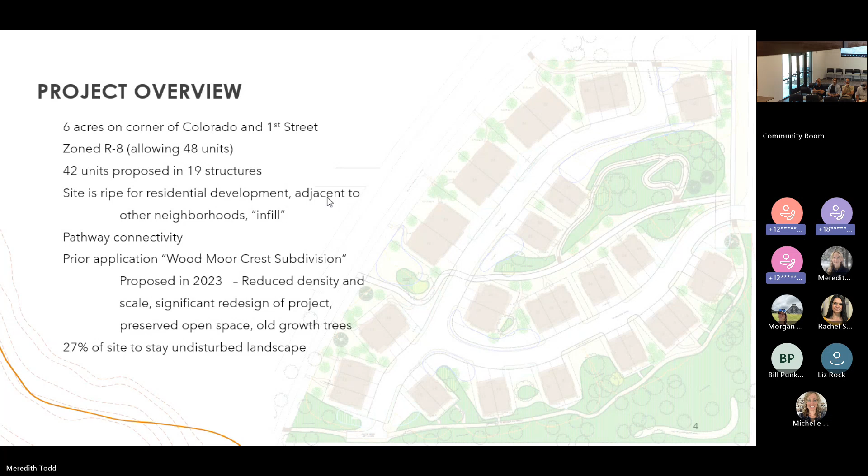Just as an overview, and I don't want to belabor what a PUD is compared to just a subdivision application. Overall, the PUD will permit some flexibility with code interpretation.

The goal is to preserve natural scenic qualities, efficient use of parks and open space, harmonious variety of neighborhood development and urban amenities, and to promote local housing. That is from the McCall City PUD code. I think this proposal does exactly that.

I mentioned this, but the density being below what is allowed in this zone is noteworthy, and this developer is not asking for any density bonus here. We are going to ask for some code alleviations, and I'll talk about them later, but there are some code alleviations we are asking for, which are really just inherent in a townhome type proposal.

As I mentioned, so what are these 42 units in 19 structures? Would you mind going back, Meredith? Thank you so much. We have what they're called Meadow Townhomes, Trailside Townhomes, Pine Grove Townhomes, Aspen Glade Townhomes.

If you look closely at the design, it's been amazing what Epicos has done with this, which is to show you the 2-story duplexes, 2-story daylight duplexes, 3-story duplexes, and 3-story triplexes.

The 3-story triplexes, the proposal has 4 of those, and they are really thoughtfully placed on the property in order to preserve open space, in order to preserve historic trees. Also, so that when pedestrians or drivers on First Street or Colorado approach the neighborhood, it's not like this mass of development. It really looks more natural and cohesive with the property.

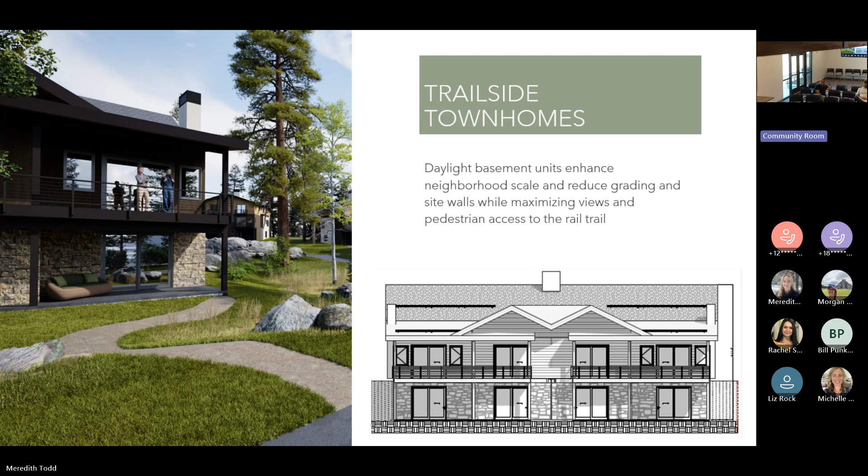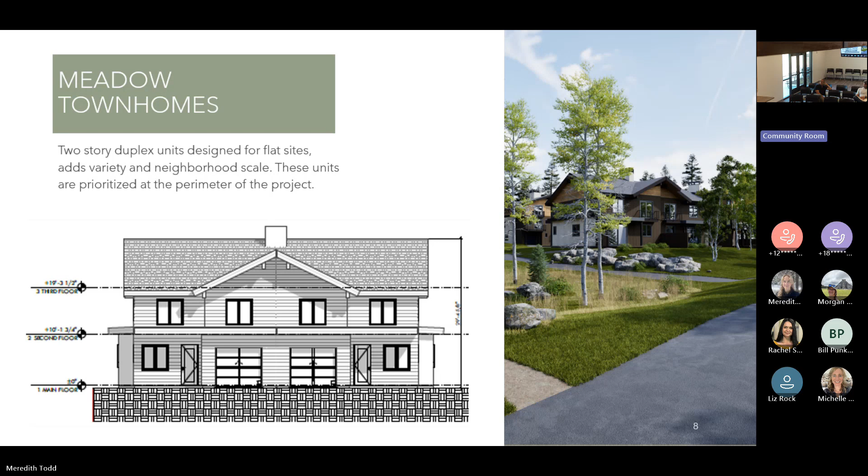The Meadow townhomes are a 2-story duplex that works on a flat site. These are a little smaller than the last duplexes, and we're locating some of them more adjacent to the existing neighborhood, so they stay in scale with it—2 stories tall with a roof, nothing outrageous. We're not trying to push any height limits on any of these.

The next unit—jump in if needed, since I've been in these files so long—is the Pine Grove townhome, where we start getting into 3 stories. They are predominantly buried into a sloping site. The lower right image looks at the backyard, showing how they exit out their back door onto a trail or pathway. The left image shows where the car pulls up to the garage, which is a partially buried garage and lower level, keeping them stepping with the site.

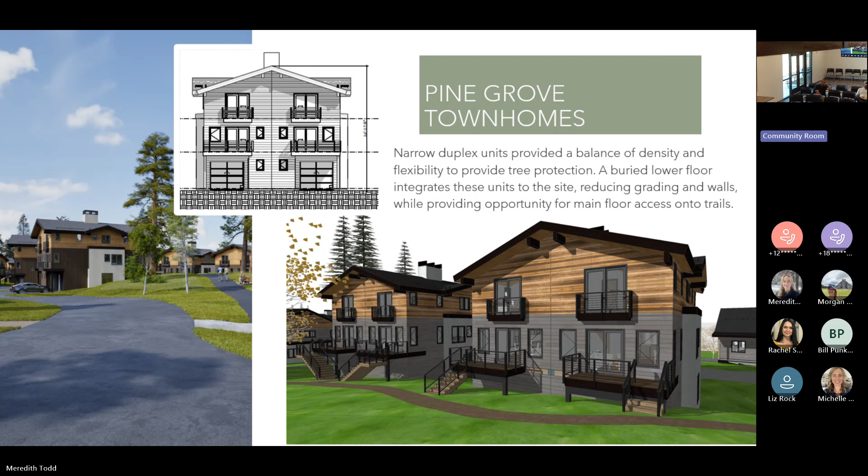Those are the ones where we really skinnied up the footprints. Then there's the Aspen Glade townhome, which is a triplex unit. We took that previous unit, opened it up, pulled it apart, and put a third unit in the middle. The middle unit is actually slightly larger than the side units, to help compensate for not having those extra windows and things like that. We think those will be very livable, and they help us keep the density a little higher. We located them in areas where we have a bit more room between the existing trees.

I'm not sure how deep we want to get into the design of the units. The materials and siding are very much in compliance with what's envisioned in the McCall design review code, using natural colors and natural materials. It'll be a combination, and because it's a townhome product, we'll use some fiber cement and composite materials with good warranties to keep longevity up and maintenance down.

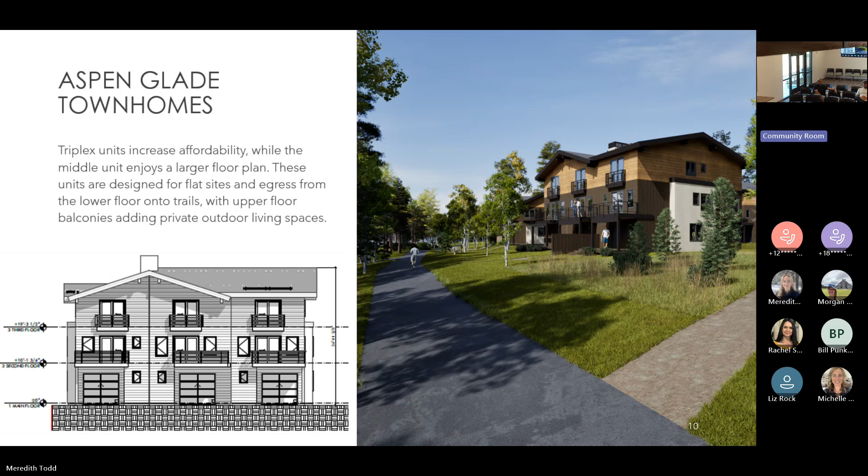Next slide, back to Emily. The highlight of the landscape for this site is preserving as much of the native vegetation as possible, then enhancing it with more natives brought back in. I walked along the rail trail on my way here, and I'm excited to continue the continuity of those aspen groves you get on the skate park side, back up into the site.

Everything we're proposing already exists. We're not reinventing anything, we're just making it new and fresh while fitting within the fabric of what we love about McCall. In addition to keeping the large trees, we're implementing fire hazard mitigation, so some of the small trees will be thinned. We'll have buffers around the units that increase resiliency in case of fires, and we're really close to the fire station, which is great. We love these urban infill projects because we get to keep more of the existing trees.

Just to note, as you'll see in the rendering above, there are some boulders. We are not doing any concrete or manufactured retaining walls for this project. Any retaining is done with natural local boulders, and those locations are really minimized in order to preserve trees and add pathways. There's no retaining around the buildings because we integrated the architecture into the site plan.

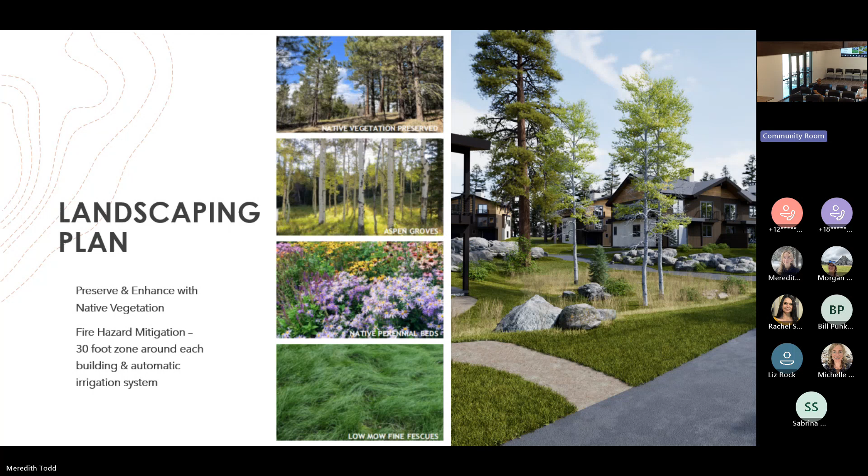Those are to the standards requested by our wonderful Parks Committee. We had a really great experience working with that committee. They had some really helpful feedback, like recommending we add a transition zone of hard surface 10 feet off the hard surface pathways, to transition to the natural surface gravel pathways so gravel doesn't travel onto the hard surface and increase maintenance. Great experience saving trees and adding paths, and the site will preserve native vegetation.

With that, we can turn it back to Amy for some of the more technical amenities. Thank you, Wayne and Emily. The PUD code requires 2 amenities. This proposal may have many more than that, but as a commission you just need to find that it meets that requirement. We've talked a lot about that east-west paved pathway.

Another amenity specifically recognized by the code is a picnic area type of place. This would be maintained by the HOA, with a natural surface pathway leading to the picnic area.

We are proposing 4 deed restricted local housing units. The contemplation is that they'd be throughout the subdivision, not all grouped together as previously proposed, which from city staff's perspective didn't make sense. This would allow, if the developer decided to do a phasing proposal, that a deed restricted local housing unit would come online as each phase is built, rather than being held off until the end. There would be one in the first phase, one in the second phase.

That's just part of the opportunity in the PUD for the developer to come up with a development agreement with city council to do a phased project, so we're leaving that door open. Talking with Alan and his team, it sounds like the infrastructure would all be put in at the same time, with phased construction. And I loved this when we met with the parks group.

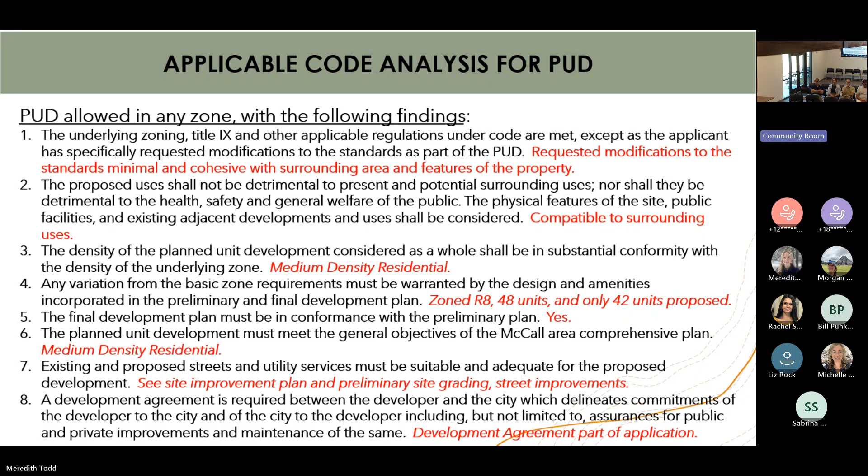And then the last aspect is that development agreement, which is required between the developer and city. I included a preliminary one in our packet, and then we just work on that throughout the application to really make it make sense with Morgan and Meredith and the whole group on what their requirements are. So I just wanted to touch on what that is.

Specifically, what are we asking to be alleviated? This is where we hit on it, and it is outlined in our narrative. I'll just highlight them, and then obviously I will stand for any questions.

These are all code alleviations that you see in townhome projects, because townhome projects don't make any sense with setbacks and lot coverage. They share walls, so they don't make sense under certain residential codes generally. So you'll see the minimum lot size, setbacks, lot coverage, the private open space. There is no private open space when two people share a wall. And so those are really just the common ones that you see with any kind of townhome project.

The garages are a little bit more unique maybe in this PUD than all of them, but this garage door is occupying more than the allowable 50% of street facing building facade. So this is a little bit confusing, but all the parcels are going to be accessed by internal streets. So the garages, because of the way that they are, are over city code allowance, but they're not public facing, so the impact is very minimal there.

The private right of way is less than 60 feet, clustered density to preserve trees, and it still provides a 22-foot driveway parking spaces. And then the height limit.

I had a lot of back and forth trying to understand with Emily, and she was so helpful to understand what really is the impact of this height limit. Like, are we going really high? On the 35-foot city height limit, the 4 triplexes exceed the height limit from existing grade, but at the proposed grade upon construction, they actually won't exceed the 35-foot height limit.

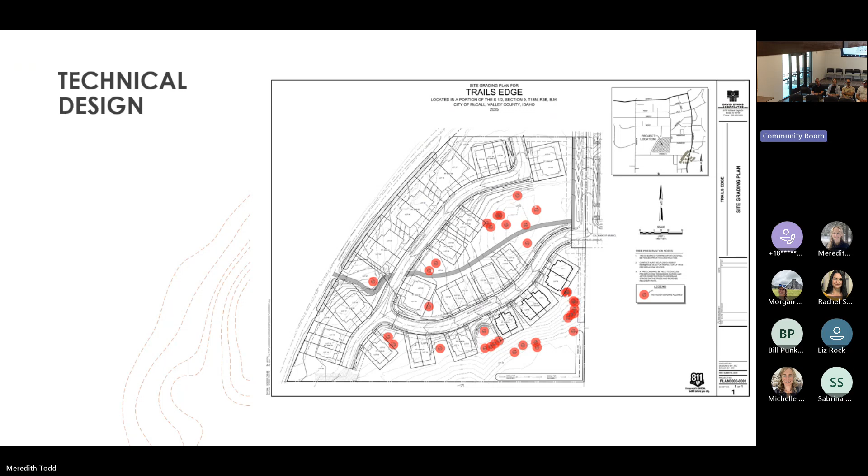I will probably say thank you and sit down, and then if there are technical design questions, we'll have those go to the group - who knows them better than I do - and also some of the really nice depictions that we want to leave you with here at the end.

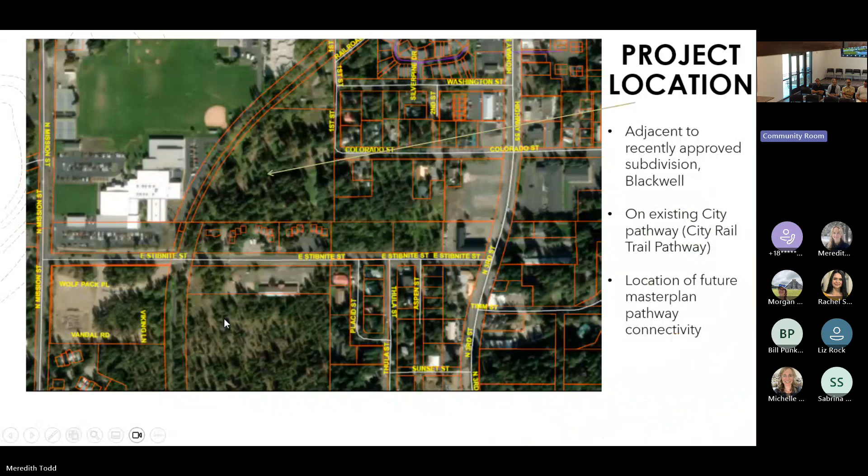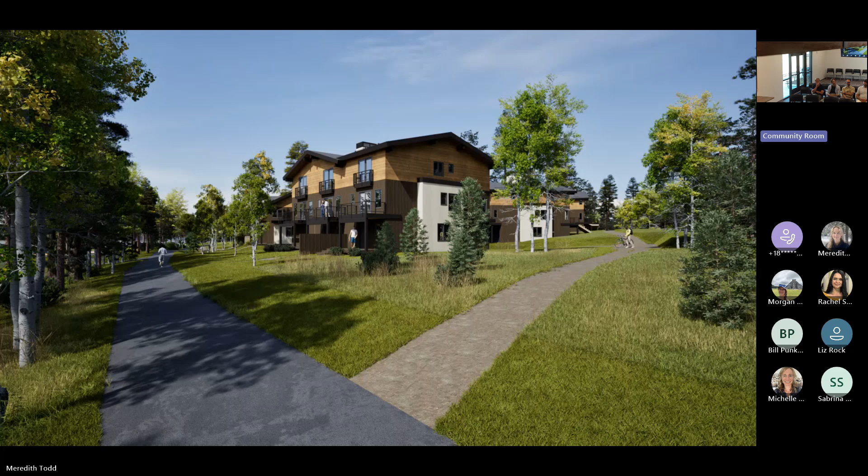Great, so overall we're asking planning and zoning to vote tonight. We would love to see a vote tonight and not a delay. And the conditions of approval proposed by Meredith and Nina make sense, I think. We are working with the city engineer. So we would ask for an approval with the conditions of approval as put forth by staff. Thank you so much, I'll stand for any questions - or I'll sit and then you just tell me.

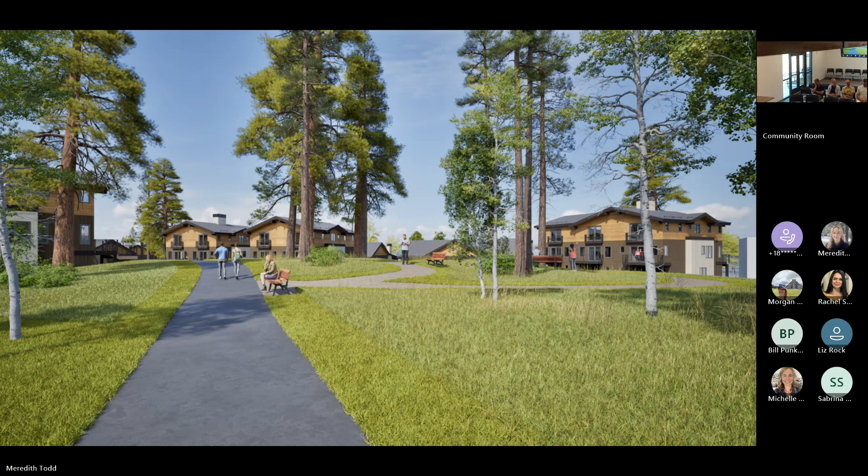All right, commissioners, any questions for Amy or the applicant? Wayne, the 3-story units back up against the hillside where that's undeveloped, right? The 3-story - so I don't know if you can bring that back up. There is. Yeah.

I'll take any. Primarily, yes, so the crown of the hill, which we didn't really talk too much about, we're gonna keep that completely undeveloped. And we're putting those 3-story units into the hillside along the downhill side.

So my question's about the 35 feet. Existing grade is a slope, but you're gonna excavate that down? Yes, existing grade is a slope. So the 35-foot height limit, one thing we maybe didn't get into detail on is, I don't know how many of you remember back around 2006 when they went in and started excavating those roads. So there's a lot of man-made issues on that site.

There's a couple of really deep holes that were dug, which are now immediately under some of these townhome units, like in that image you see. There's probably 6-8 foot deep holes. So we're basically asking to ignore those as existing grade, even though they're existing, but we didn't want to fill them and get a new survey just to ignore them. So there's some height limit issues in spots where the existing road site was carved up 19 years ago or whatever that was.

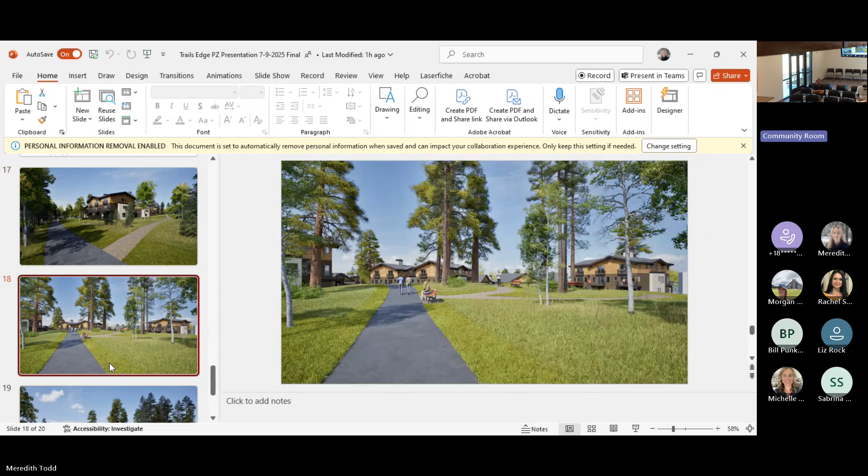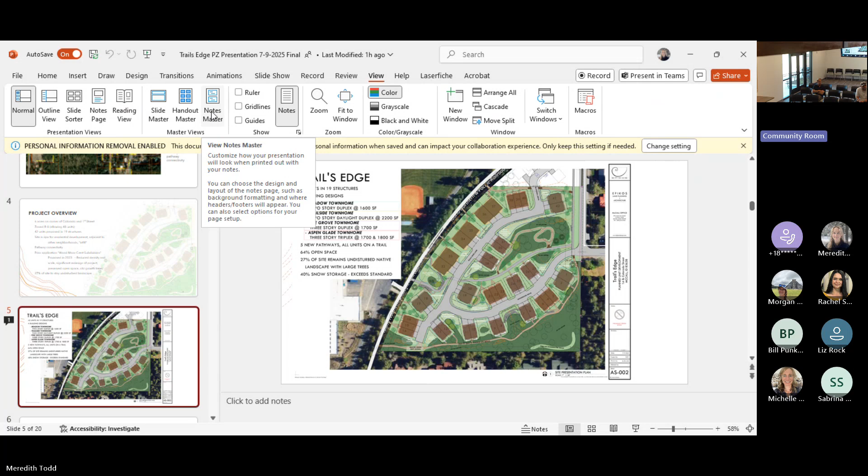There is one 3-story unit, this one right here. Of the triplexes, because of the mass grading of the site, we weren't able to situate those 3-story units low enough to set them into the earth. We have to fill a little bit, and it's not the entire roof line that's over 35 feet.

It's because the site is sloping, there's like one corner plane where our existing grade is lower than our finished grade. The 3-story triplex units are designed for the flat sites, as opposed to the 3-story duplexes that are buried into the hillside. So in the middle we have duplexes and triplexes. The duplexes back into the hillside and are buried, so those have no issues with existing or proposed grade because they're buried.

Then you get into the triplexes built for flat sites. They exit out the back door of their garage on grade. But because of the mass grading of the site, we were not able to set them low enough on existing grade to be less than 35 feet from existing grade, but they will be less than 35 feet from finished grade in all cases. Units 14, 15, 16, which was in that rendering, have a little bit of that issue on that one.

So I don't know, that's a long-winded explanation, probably more confusing than it was worth. The buildings are not taller than 35 feet as designed, and most of them are below the grade of First Street anyway, so it's not like the people across the street are gonna be looking at a roof.

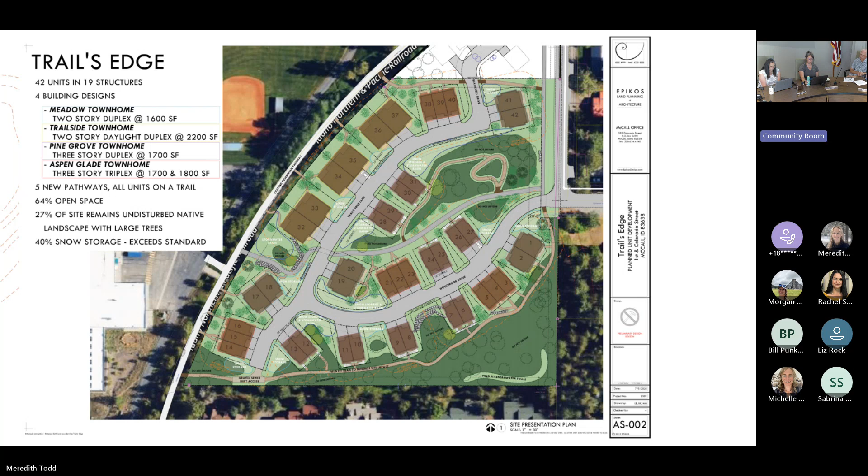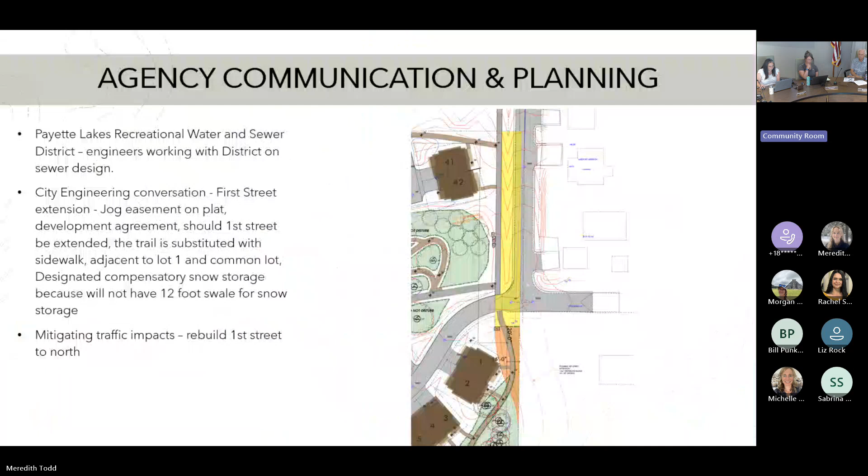In fact, one of those last renderings, if you wouldn't mind tabbing to that, is a view where you are on Colorado and First, roughly at that intersection. We wanted to show that we also stepped the two-story units back one. So this is our estimation of First and Colorado.

You can see the pines on the right, those are the existing pines. If anything we've probably undersized them, they'd probably go off the top of the screen there. You can see the home nearest you is a two-story home on the left, and as you get into the project, that's where you get the three-story units. The ones with little corners of those roof edges are at 35 feet.

Hopefully that helps, I don't know, probably confused things, sorry. On the 3-story units with the 2 garages at the bottom, is there any storage in those, or is it just a garage? It's a garage, I'm trying to remember now.

What we ended up doing is a 2-car garage in a tandem configuration, so it's actually a 1-car door for all intents and purposes. We don't have the width on those units to go wide, so it's one car in front of the other, with a lot of storage in that space as well. So it's not 2 cars that you park side by side and close the doors, it doesn't come up that way.

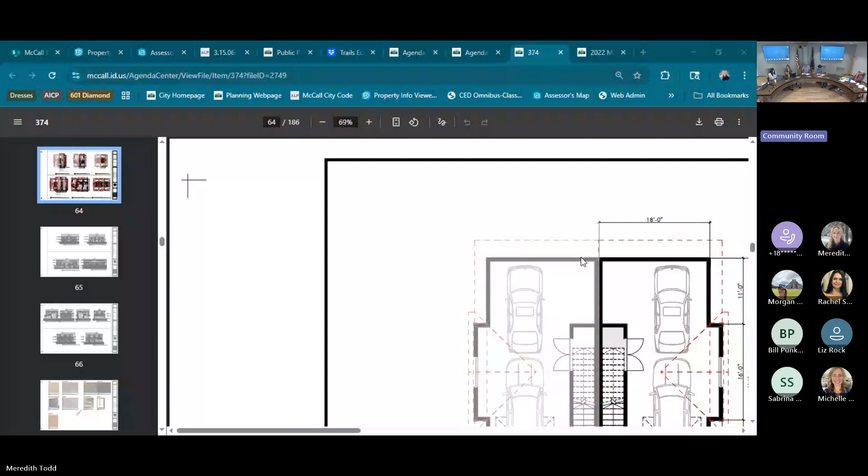When you park in those, they're not side by side, they're front to back. So you have a 1-car garage, but you have another car, 2 cars front to back, and a single door. It kind of looked like 2 doors side by side. That's what it kind of looked like.

Oh, so here we go. Here's a floor plan. On the left part of the screen, we have an F-150 combined with a passenger sedan in there, so they both fit end to end. Then we have room for a small workbench, garbage cans, or bike storage for sure on these properties. So there is storage in there, along with some mechanical and room to walk around. It's a nice size.

But again, that's kind of the sacrifice that has to be made in order to squeeze these together and save those trees, right? So we couldn't do a standard 28-foot wide unit. Had to go down.

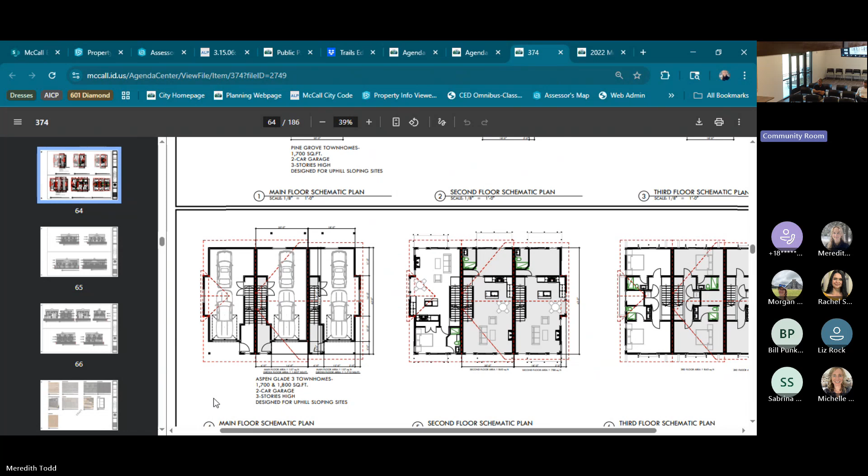Commissioners, any other questions for the applicant? Okay, thank you. Meredith, staff report? To be brief. No, I'll torture you.

So your staff report, Nina Schaefer from Jacobs Engineering helped me prepare that. She did a lot of the code analysis since this is a bigger project. I then did a review of hers and reviewed it again with the application team to make sure we weren't missing anything. Most of you were among us during the previous iteration of an application for this site, but that is not what we're deliberating today.

My impression is that this design did start at the right place with the city code, explaining: get to know your site and work with the topography and conditions of that site, then proceed with your design process rather than calculating your maximum density and maximum square footage allowable and going from there. So even from the beginning, process-wise, they deployed the manner we like to see for site planning, where they acknowledge that we have a lot of rocks, ditches, and strange features to our community, sometimes left over from previous development attempts and sometimes just made by nature.

In this case, the trees on the site are extremely significant. Even in the previous names of the site, it used to be called Cathedral Pines at one point, and it really does kind of feel almost holy to walk through, if that's how you feel about things, because those pines are so big and old and impressive, and we don't have a lot of those to celebrate, especially in the downtown core at this point.

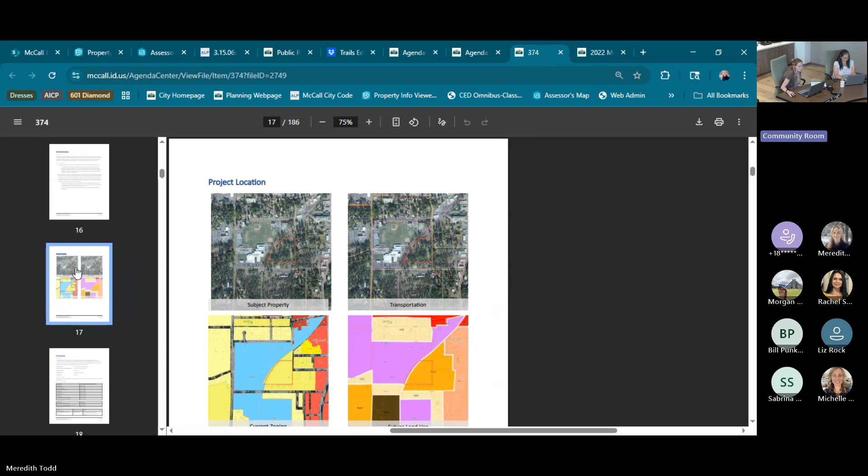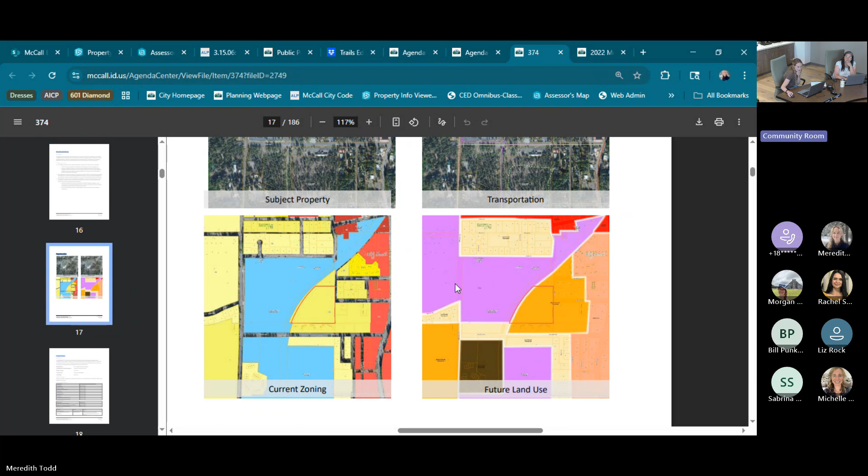So it is located there on Colorado and First. It's kind of in a fun patchwork area where many zones come together, providing a lot of opportunity for creativity in putting a medium density residential development in there, blending the civic zone into a lower density residential followed by commercial areas. It's kind of the style of development that planners like to see when we talk about infill development, where it weaves the fabric of different parts of the community together so that we can eventually have a complete whole. It's located along a lot of impressively underdeveloped right-of-ways.

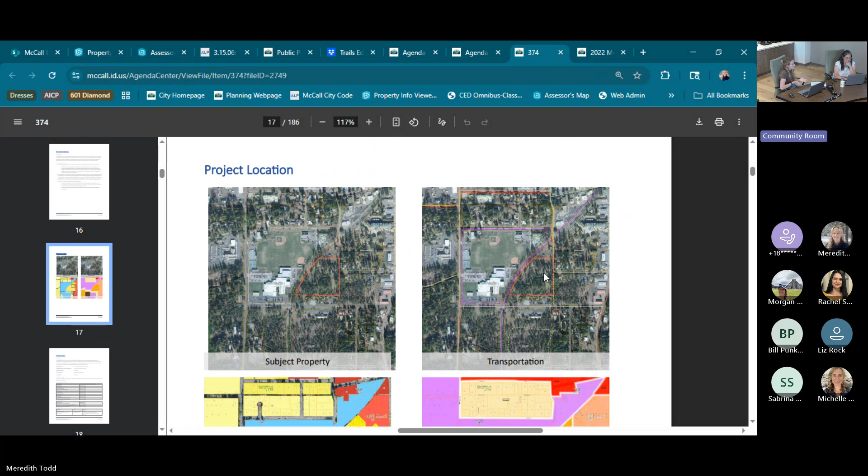First Street was originally half-platted in 1918 when McCall was named Lakeport, and then nobody ever platted the other half. So the west half of First Street doesn't officially exist, and we're trying to make it officially exist now, 107 years later. That's just the game we play sometimes, and this development has accounted for their portion of completing the street.

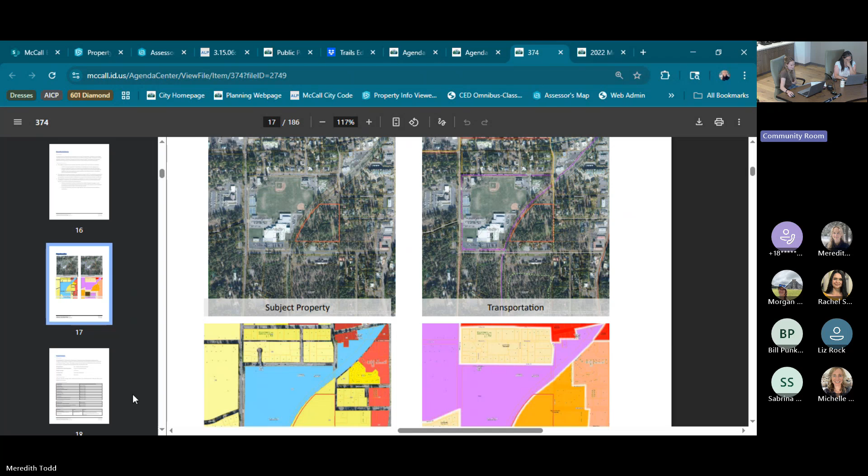Many different documents have been submitted. We've already got a couple ideas for some amendments to the development agreement before we would recommend it get to council, that the development team is happy to work on with us. Those mostly relate to that First Street extension concept and getting the language of how you trigger an eventuality that we don't know when it will happen, but we'd like to reserve that opportunity for the future. Programming that into the development agreement is a really good tool at our disposal.

This project did go to the Parks and Recreation Advisory Committee 1, 2, 3 times to make sure they could get a good recommendation out of the Parks and Rec Advisory Committee that would be a satisfying contribution to the Parks Department, as well as meet the standards for a planned unit development of this size.

So they're doing a combination of a paved and maintained pathway, the purchase of some materials like doggy waste baskets, trash bag dispensers and trash bins, and then an in-lieu-of-fee contribution, an amount that's been accepted by the Parks Committee at this point. That's included towards the end of your materials.

So that does come with the recommendation of the Parks and Recreation Advisory Committee. Dave is a member, so we may have a question about whether Dave can vote as a planning and zoning commissioner, as long as he notes he's a Parks and Recreation Advisory Committee member. I think that should be fine since there are different rules.

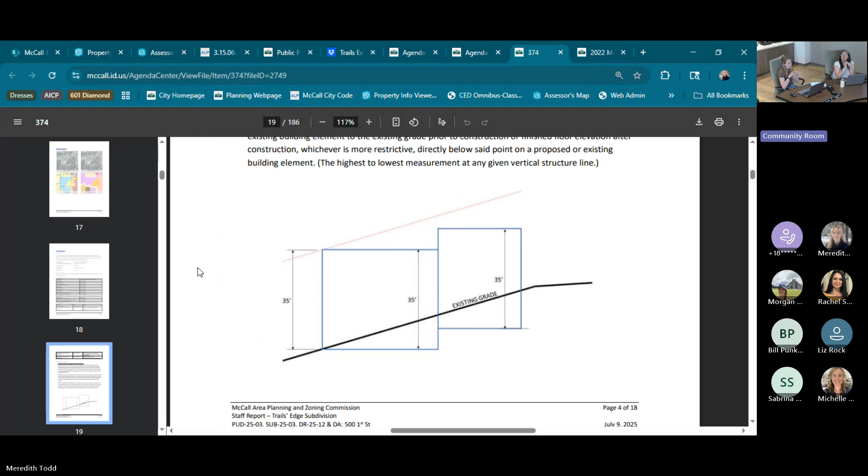The little description of building height. So here's the diagram that we use in code to talk about the building height restriction definition. Our 35-foot building height restriction is defined as building height measured vertically from any point on a proposed or existing building element to the existing grade prior to construction, or to the finished floor elevation after construction, whichever is more restrictive, directly below said point on the building element.

So that doesn't mean measuring the finished grade at a daylight basement where the tallest roof is way over here and might technically be higher up, but not at the same point of the building. You don't get to do that. You just do any cut as you go along the bread loaf of a house.

So in any case, because this is a planned unit development, the development does have the ability to request alleviations, and you have the ability to grant those alleviations as you find them warranted by the design and amenities proposed. In this downtown core area, even in the adjacent commercial zoning, we do allow for going taller.

We might even encourage it. I know we haven't seen a lot of this extra height occur yet in McCall's history, other than maybe one project back in Sam's original tenure and Robert's tenure that was maybe a 4-story building a few blocks away, just across from the library.

And we know the library now is a little bit taller. So this development, proposing buildings not directly adjacent to those single-story, single-family homes in the Colorado area, and in one case butting up to the railroad pathway—1.5 cases butting up to the railroad pathway—those get hidden quite well from most of the public realm, which is good design and what we like to see. But it does exceed the official height limit as stated in the code, so that's why it's a requested alleviation. I don't see any problem with it as staff.

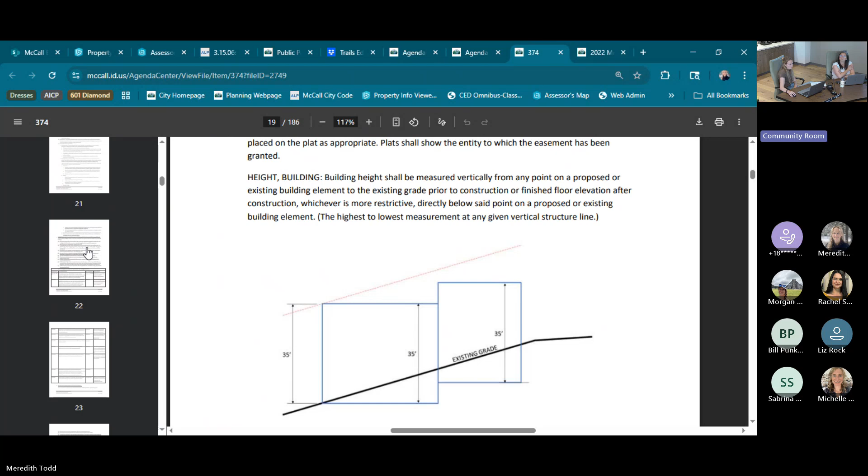As we get into what code criteria applies, this is under your purview, the planned unit development criteria. You have a table within your staff report. We did not find any alarming places of non-compliance during review with the planned unit development criterion.

The one thing I would mention is I hadn't updated the staff report to include the language for resolving the First Street extension easement, which would be a disagreement with criteria H. So I have a recommended additional condition of approval, based on speaking with the project team earlier today about how we would resolve that before going to city council. I'm happy to provide that sample condition if you'd like it later.

It's subject to design review because any of the units, even if an individual purchaser would like to hire their own building crew to come in and build it, they would need to adhere to the design that this commission approves for this development in this place. So you'll review the design criteria.

And then it is a subdivision preliminary plat, so we have to go through the criteria for a subdivision preliminary plat. Planned unit development and subdivision preliminary plat are recommendations to city council. Design review can be decided at the planning and zoning commission level.

And then the development agreement, the things we consider are the timing for the phasing, since it's not going to all be built in one phase. We would want to know what phase of platting will occur - will we go from north to south, out to in, south to north, et cetera? It's good to know so we can know what our permitting expectations are as time goes on.